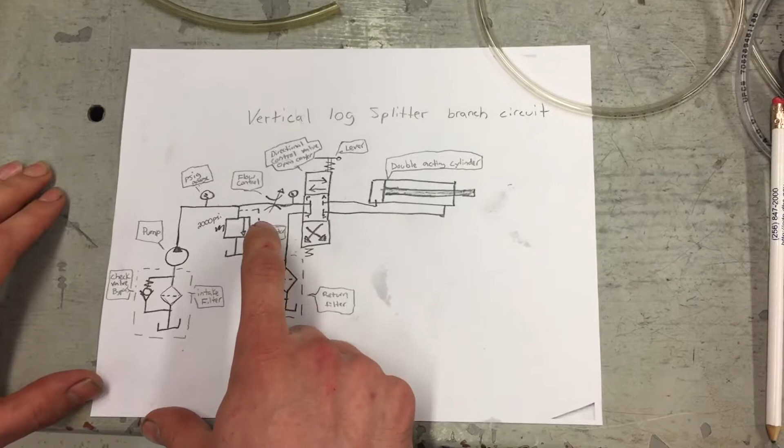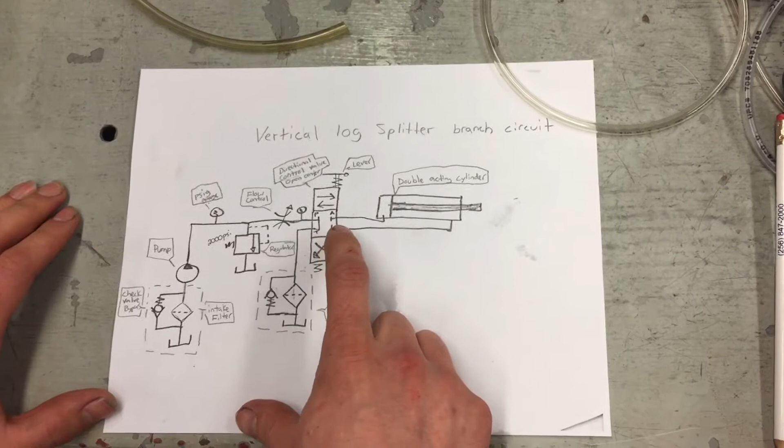We have our flow control to limit how fast the cylinder goes, and then that goes into our directional control valve with the open center. We do that to conserve energy when we're not using the cylinder. That works by the flow going directly straight back into the tank.

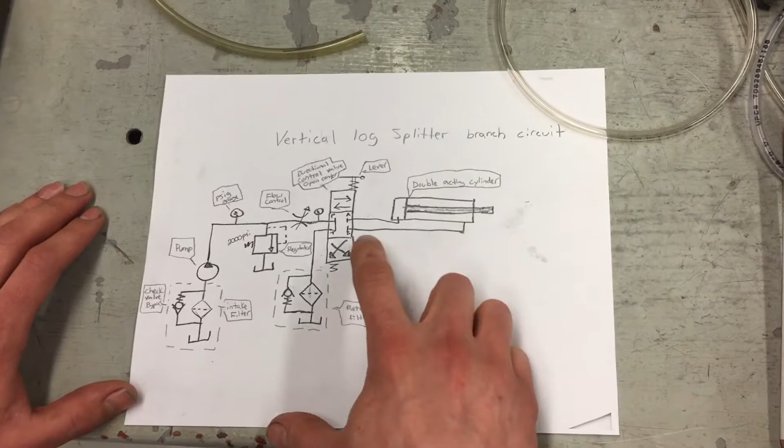Then we have our lever to operate our cylinder. One way goes out, one way goes in, and then that goes to our double acting cylinder to split the wood, and that goes back to our directional control valve and back towards our tank. But before it gets to our tank, it will go through a return filter with another bypass check valve, just in case they get plugged up.

Okay, I'm Nathan, and let's walk over here to our circuit that we have set up. So right here we got our pressure through a hose to our flow control to adjust the flow as in the diagram that we saw. And this is to a gauge so we can see how much pressure we got. We go into a directional valve so we control the way the cylinder goes in or out. And then the cylinder, and all of this goes back to the directional valve to the tank.

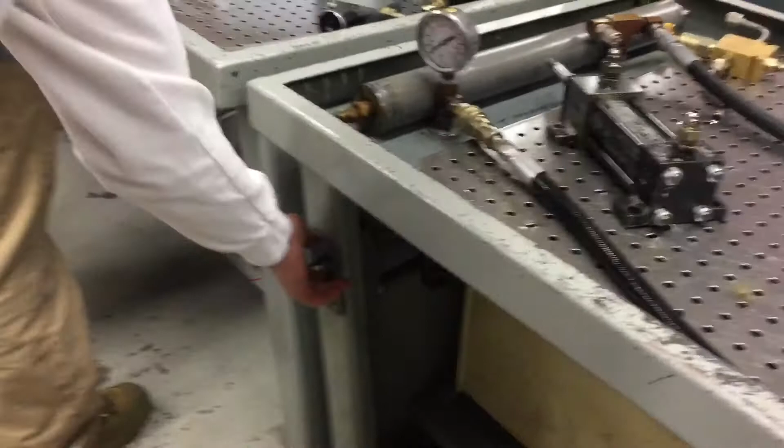And if we turn it on, we push it out, slowly moving, all the way out. Then if we adjust the flow control and then kick it back in, it's a little faster.

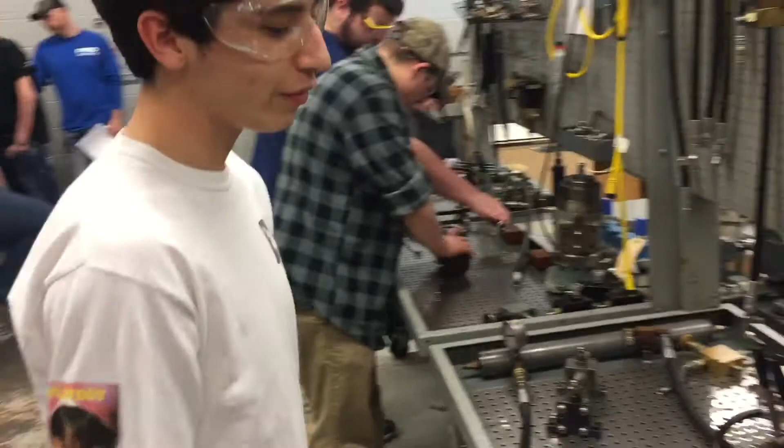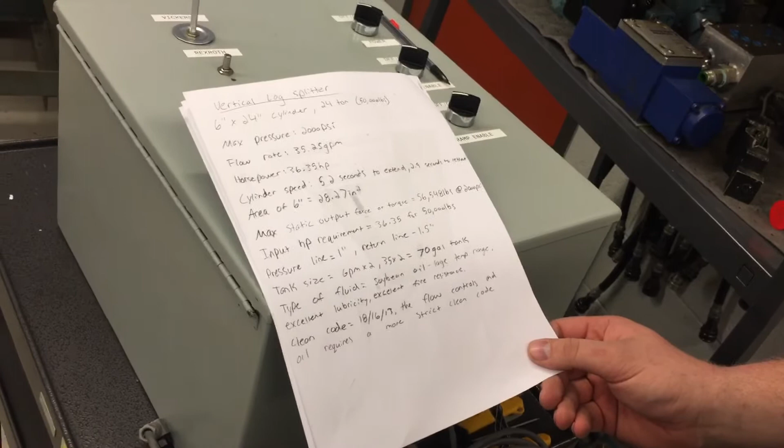Hi, I'm Brian. I'm going to go over some of the calculations we did. So basically for the vertical log splitter, we went with a 6-inch diameter by 24-inch, which is 24 ton, approximately 50,000 pounds. Our max pressure was 2,000 psi. Our flow rate was 35.25 gallons per minute. Our horsepower was 36.35 horsepower because of how big the cylinder was. And then we figured the cylinder speed was about 5.2 seconds to extend and about 2.9 to retract.

The max static output force or torque is 56,548 pounds at 2,000 psi. Our horsepower requirement is 36.35 for 50,000 pounds. Our pressure line was 1 inch and our return line was 1.5. Our tank size, they say whatever your gallons per minute is times 2, which would be a 70-gallon tank.

And we chose the soybean oil because it's got a large temp range, excellent lubricity, and excellent fire resistance. And then we went with a really strict clean code because of the flow controls and the type of fluid.